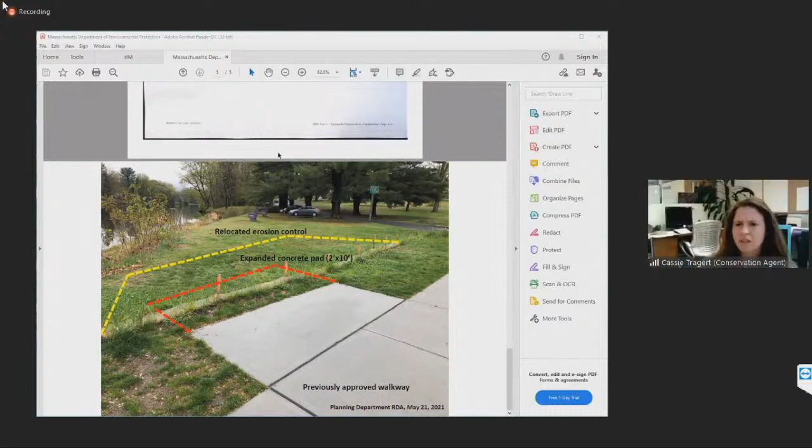So previously, we issued a negative determination type 3. And then the only special conditions were that the commission shall be contacted 48 hours before the start of work to inspect erosion controls, and shall be notified upon completion of the work to inspect the site stability before erosion controls are removed.

Thank you. Would anyone care to make a motion, with that in mind? Motion to issue a negative determination type 3 with the same condition we had previously for the pre-construction inspection of the erosion controls. I'll second.

All those in favor, roll call vote. August? Aye. Busa? Aye. Buttrick? Aye. Ryan? Aye. Teffer? Aye. Whittemore? Not present. Motion carries.

Thank you. Can I ask one question? Of course. So based on what I just heard, it sounds like there has to be a 48-hour notice before it would be poured. Did I understand that correctly?

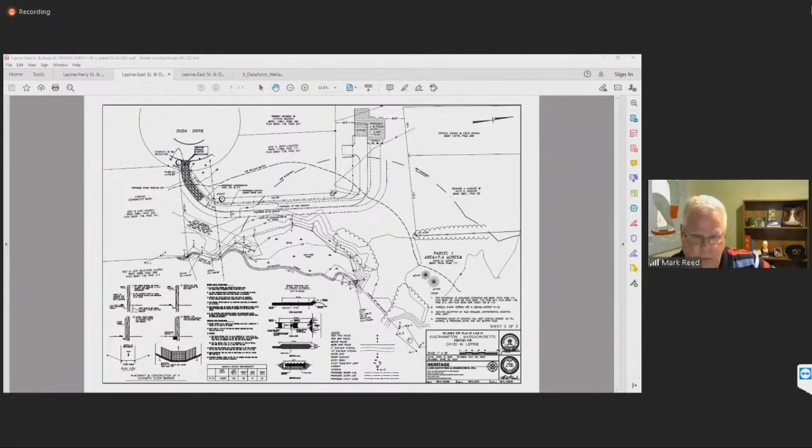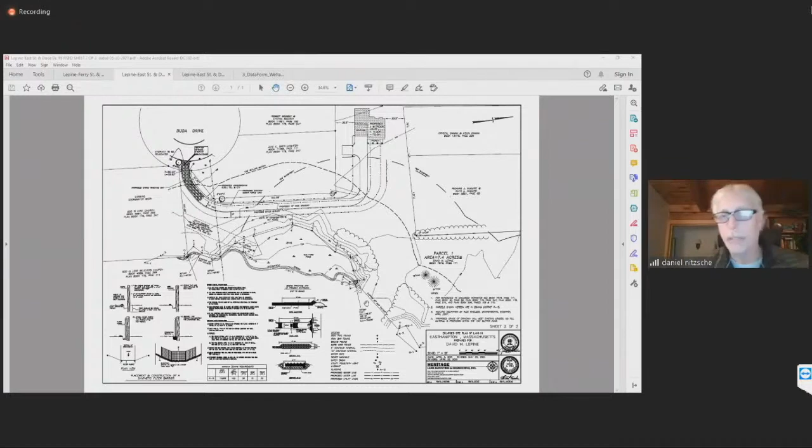Certainly. Thanks, Mark. So when we went to the property on Saturday the 8th, we looked at the pond area as well as up gradient or upstream to get the full delineation of the resource areas that would project jurisdiction into the work zone. We started over by the detention basin on the southern end along that intermittent stream. I believe on the documentation provided to the commission, we show the stream stats data that confirms that is an intermittent stream, despite the fact that local folks believe it flows a lot. It still doesn't meet the criteria of a perennial stream. Its watershed is too small in size. So we confirmed the intermittent part, and then we delineated the edge of the old farm pond essentially as a bordering vegetated wetland that's bordering on that stream down to the outlet structure.

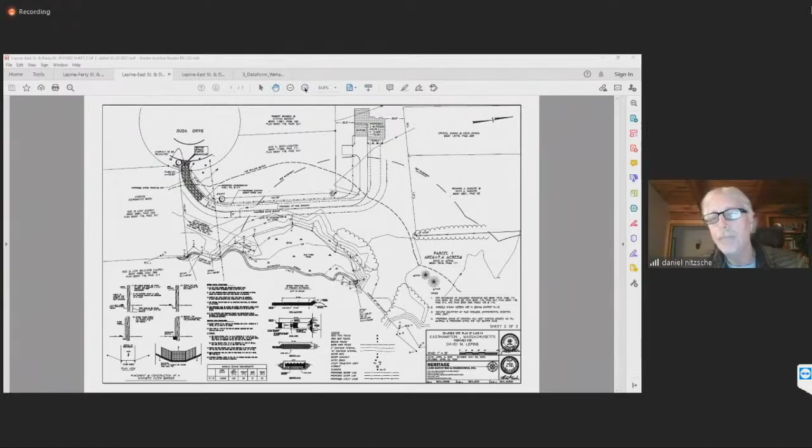And then we flagged again on the downstream side, the B flagging, which is essentially bank flags, except B4 is really a BVW. There's a hill, there's a seep coming out of that slope around flag B4. That's representing more of a bordering vegetated wetland point, but the remaining flags are essentially bank / mean annual high water line for that, since that's a perennial stream going out in that direction. We provide a data form for flag 15 for the commission's review. So not much different than what Alec McLeod put out there, other than I don't know if he had the drained pond. I'm assuming it was a drained pond at the time, but we had bordering vegetated wetland to that intermittent stream, and then the perennial stream on the outlet end.

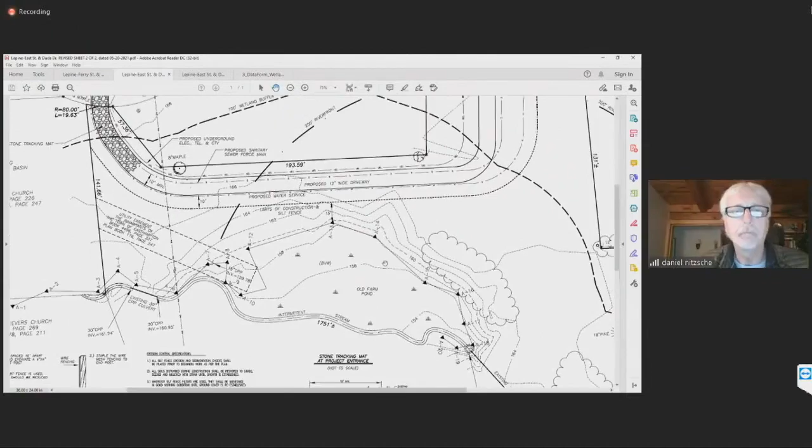So with that, we could take questions from the commission. I think we've covered what was asked of us and made the modifications, and we are in compliance with the regulations.

Thank you. Are there questions from any members of the commission before I ask mine? I had a question, thank you, Deborah. Thank you, Mark. At last meeting, I had asked how much disturbance there would be for the driveway. Were you able to come up with that?

Yes. So with the driveway, with the work within the riverfront area, it is 10,604 square feet within the riverfront area. The remaining section, which is within the 100-foot buffer zone, starts up here closer to Duda Drive and comes around the corner. There's approximately 1,800 square feet of work in the 100-foot buffer zone, outside the 200-foot riverfront area. So if you round it up, it's probably close to 12,000 square feet total between riverfront and buffer zone.

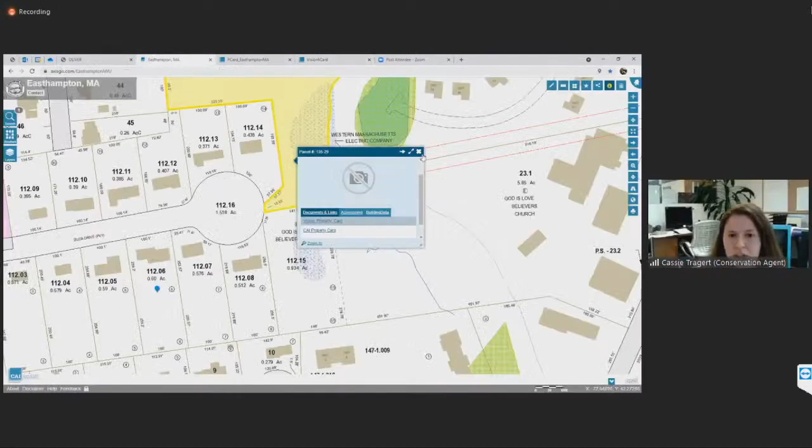Oh, that should be here. No, it's fine, it should be listed. So I can find it - you need to scroll up more. It's very slow to load, unfortunately. Let me zoom out one more.

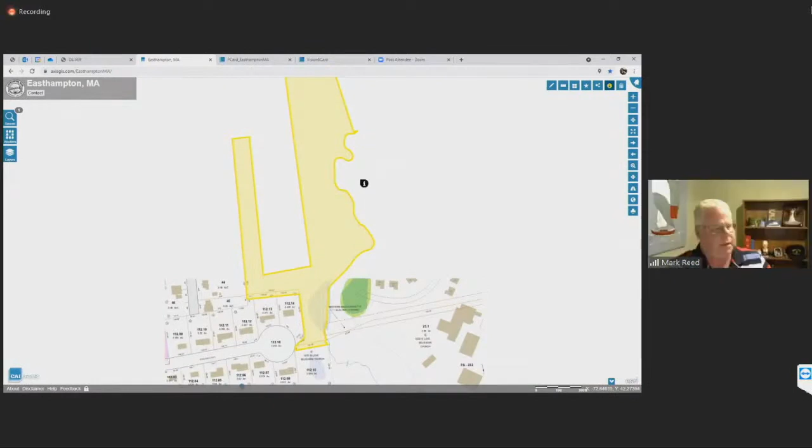It shows the total parcel area is 7.4 acres of land. Thank you, Mark. Yep, it's shown on sheet 1.

Okay, so while Cassie is so graciously reviewing that as part of this conversation, Mark, can you share photographs of the riverfront area where the driveway is proposed?

Cassie has those based on our site visit that we did. And I can look on the Registry of Deeds site. Cassie, is that book 15? Yep, so for the very, very first one, it's 1568/310. Okay, I'll keep this up.

I'm going to stop sharing. I'll pull up the pictures, Melissa, and show you. This is from the site visit. Let's see.

That's a very old deed book. Okay, here we go. All right, so this was from April 21st.

And I'm going to, let's see, open the sky. Share the screen. Okay, so where this fire hydrant is right here is the end of the driveway.

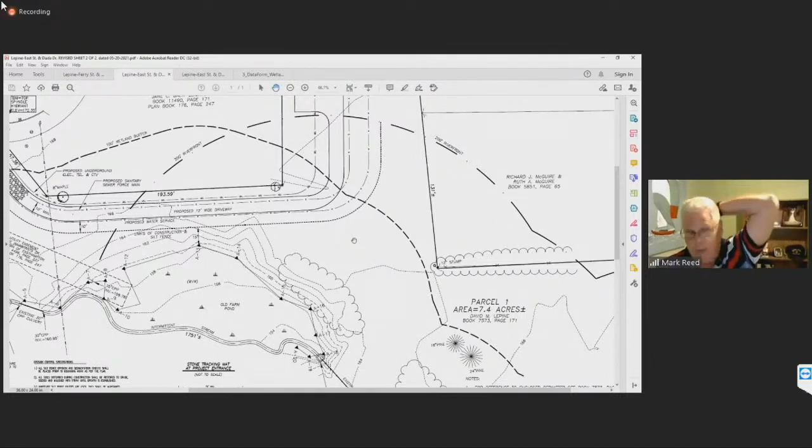Unfortunately, there's a lot of natural erosion of the embankment because of the steep slopes going all the way out to Ferry Street. But, Mark, sorry, I didn't mean to interrupt you. No, not that meets that criteria. So can you, do you have a scale tool?

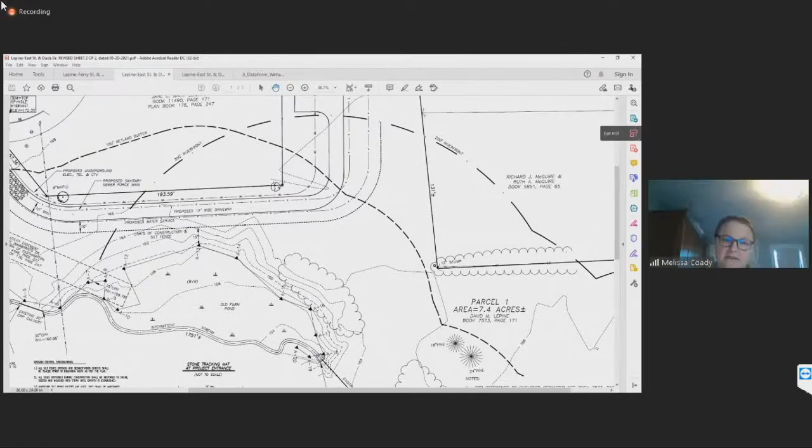Can you kind of scale off or approximate where the first 100 feet would be? It's a little atypical because we're in the arc, so I'm trying to visualize off. Right, and if that's the case, that concern will be assuaged.

So where's my little scale here? Unfortunately, this is not cooperating with me as far as my scaling tool. I don't believe so. But my scale is not showing up on my PDF.

Okay. So it is, I can scale it. I got a full-size copy of the plan sitting here in front of me on my desk. Can you do that and then hover over the equivalent points? Sure, that would be perfect. So this is a 20 scale drawing.

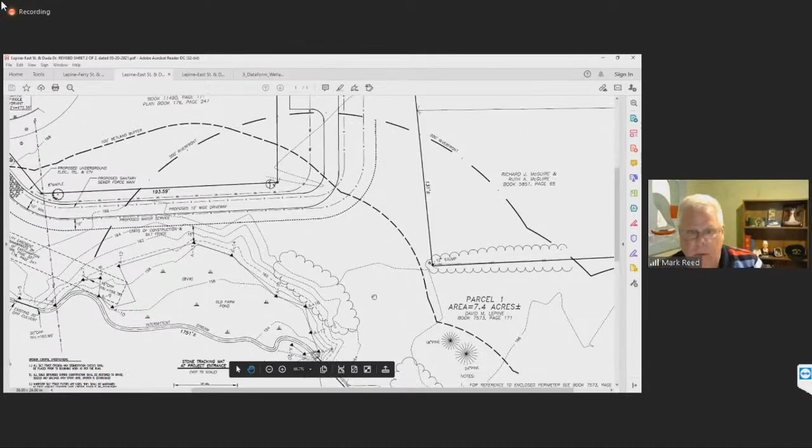So the first 100 feet is, from that control structure, which is where the riverfront starts, to the limit of work line, is 110 feet. So we're outside the 100-foot. If you draw a line straight from here to here, it's 110 feet. That's what I wanted to understand. Thank you. Yep, I guess we should have put that in the dimensioning of the drawing, but yes.

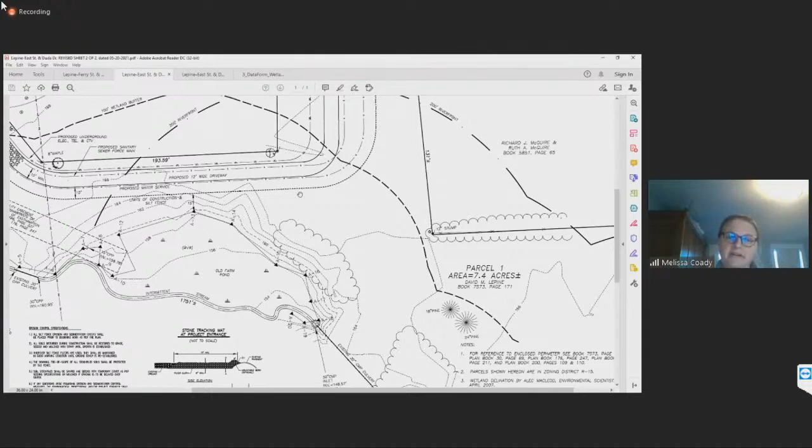Yeah, pros and cons of another line on the drawing, that's for sure. Right. Okay. So are there any other questions from commission members at this time?

So with regard to the 100-foot discussion, we've shown that we're outside of the 100-foot, but I believe there's also a requirement that if there's not 100 feet of intact vegetation, you're asked to expand that to create a 100-foot buffer. Has that been considered?

The first 100 foot is all vegetated, like shown in those pictures that Cassie has. It's either the old farm fields and meadow, or brush. So it is vegetated, but it's vegetated with something other than maintained lawn. It's undisturbed. Correct, it's undisturbed.

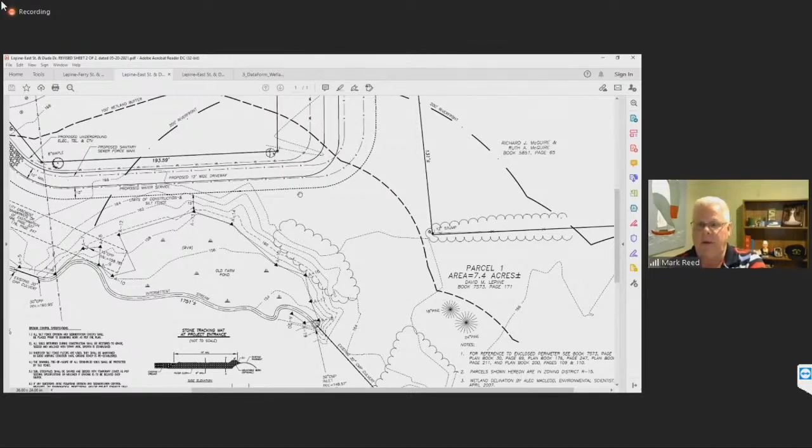Some of those pictures, Kathy, further on when they were showing the poles for the grow area, that's not lawn area. The lawn area really is where the proposed driveway is going to go - that is the maintained lawn area. And that is maintained not by Mr. Lepine, it is maintained by the abutter. Yeah, I can share my screen again and show those pictures if you want, Julie, of that area beyond where the driveway is, beyond the curve of it.

Oh, I'm sorry, I gotta stop sharing. Wake up, I didn't know if she wanted me to, if you guys wanted me to do it, I don't mind. No, I will stop sharing. Okay, sorry, it's okay, hold on.

Let's see if I can, I know I got pictures. So I think this is that area, if you're seeing it. Correct, yeah.

The culvert where it goes underground is to my right. Ferry Street is up ahead, and the perennial stream goes up through. We're inside the riverfront area. Let's see if I can get it better.

So that area would be looking back towards the piece of property that runs westerly. So you're looking kind of westerly. That area is all currently vegetated, it's not lawn, not maintained as a lawn area.

The extent of the maintained lawn is over there to the left. That's where the hop growing operation was, where all the poles were.

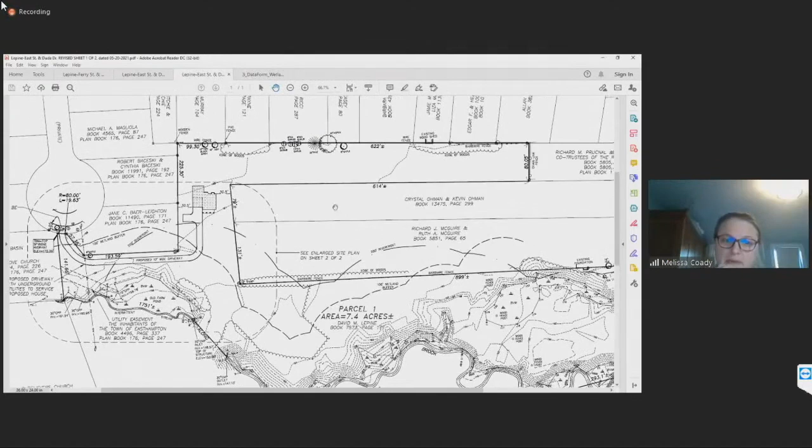Okay, oh, I had a question before Mark took the map down. Oh, I'm sorry, I'll put it back. So my question is, I was looking through the paperwork, and there's a

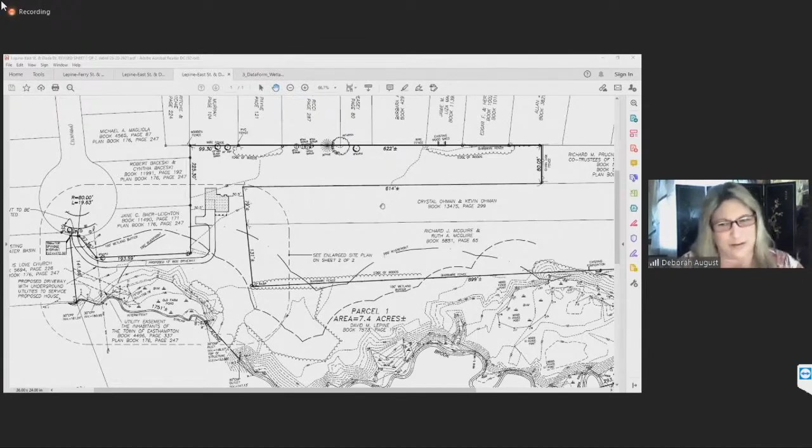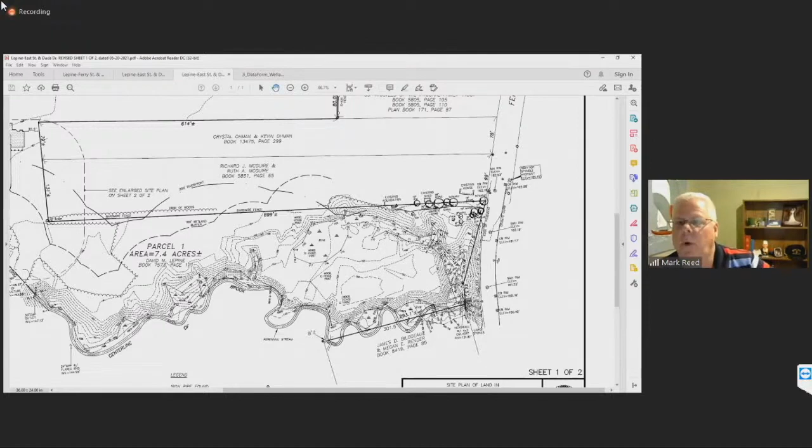Proposal for a replication area for the BVW. I don't remember hearing about it in this meeting or the last meeting. I believe that reference is, for instance, if we were going to try to build a driveway access to the house off of East Street, it would require crossing this intermittent stream. Let me zoom in on this.

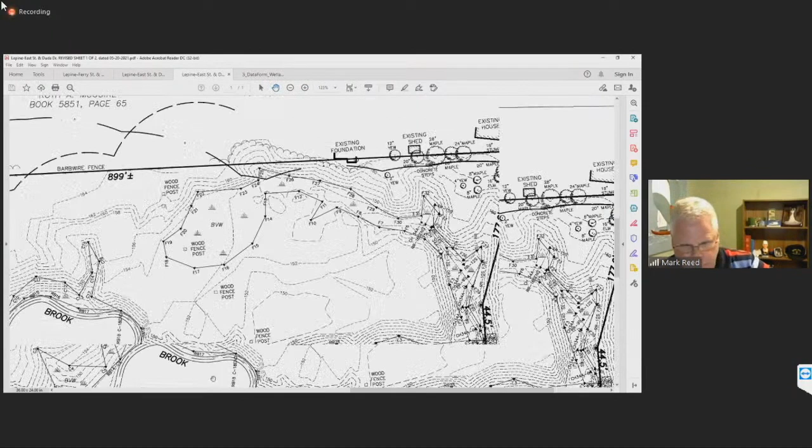So there's a series of the brook, the perennial stream. There's an intermittent stream that comes up into this wetland finger, and all BVW around here. So if someone was to try to build off of Ferry Street, they would have to put in a bridge crossing and potentially do some wetland fill or replication areas.

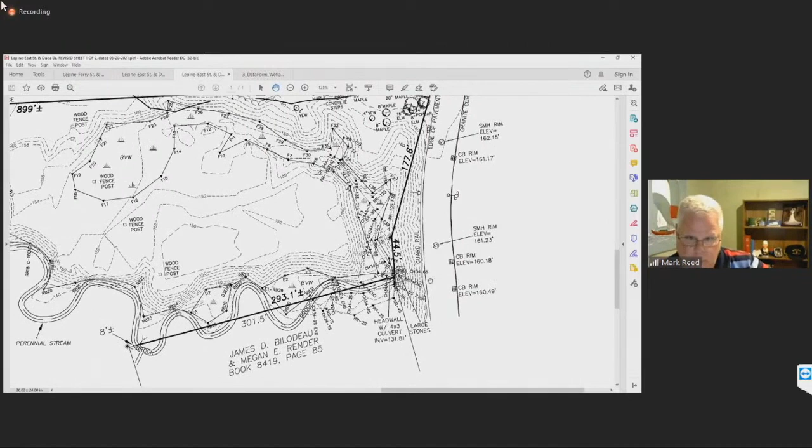Just not economically feasible to do that. The topography is very steep. I know probably some years ago, the commission had to deal with the washout of the road itself in this area because of the steep slopes and the erosion in the area.

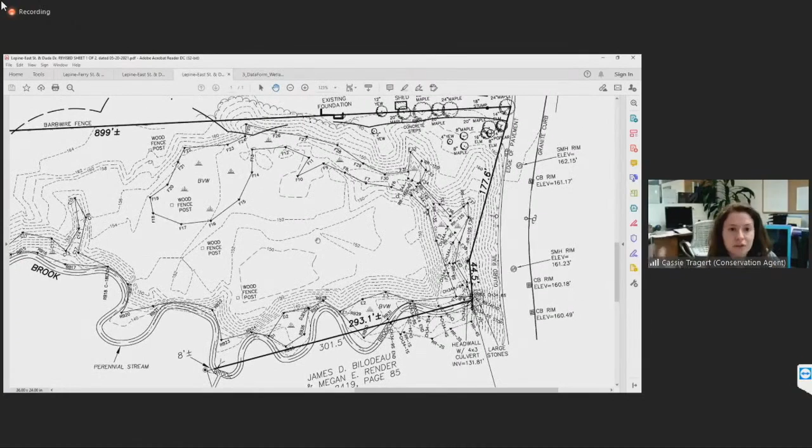So I believe that reference, Deborah, was to if somebody was going to try to come off of Ferry Street with the property, there may have to be some wetland replication. So that was part of your alternatives analysis? Correct. Okay, yeah, so it's not what is being proposed here. It's just that the only other place to come from is Ferry Street, and the only other legal frontage is off of Ferry Street for the piece. Okay, but we're not proposing that.

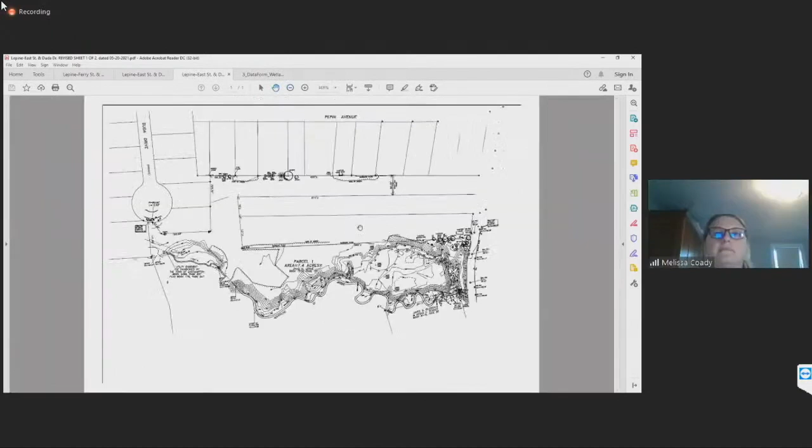Right. So it's a single family residence, which is exempt from the requirements for stormwater management. Yes. So, we've located the house outside of the riverfront area in the 100-foot buffer zone. Yep.

So is there any further discussion of the areas of riverfront within the footprint of proposed work relative to wildlife habitat functions and values? Anyone? It seems fairly limited based on historic agricultural use and the maintained lawn footprint.

Okay, and then the final standard is proposed work shall not impair surface or groundwater quality. I would agree that stormwater management's not required and erosion and sedimentation controls have been included. So the nice thing about this is that the proposed driveway that comes from Duda Drive can follow the existing topography with little or no grade change.

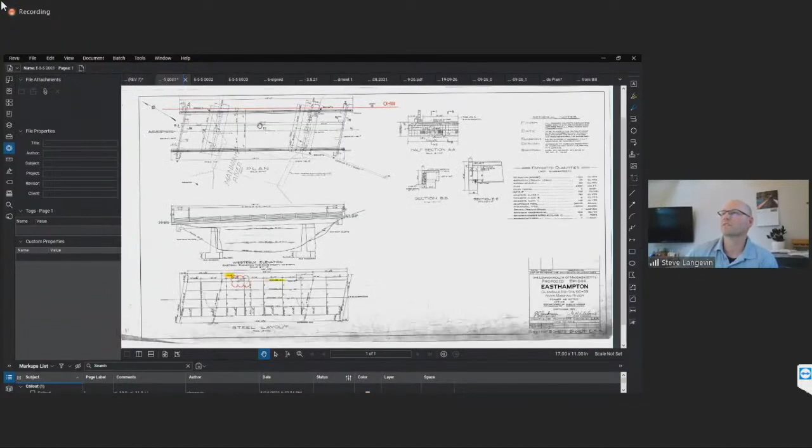The thing to do now is go to the repair detail, which shows a plan view of the repair area and a bunch of notes. But I think first I'll start off with just this plan view. So basically this bridge was built in, was it 1937? And it's a steel beam bridge with about 5 beams and a concrete deck.

The beams are in very poor condition, as Daniel mentioned, and there are lots of locations that need repairs. But the one area we're most concerned with, looking at this bird's eye view with north going up this way, is this area on the northeast side.

It's the north splice on this bridge where the two beams meet — it's a 3-span continuous bridge, which as a structural engineer is very impressive, because in 1937 they didn't have computers to design this thing. That kind of blew me away. Someone spent a lot of time designing this bridge. The beams come out to the site in 3 pieces, and at this location there's a splice that connects the pieces together when they're actually constructing the bridge.

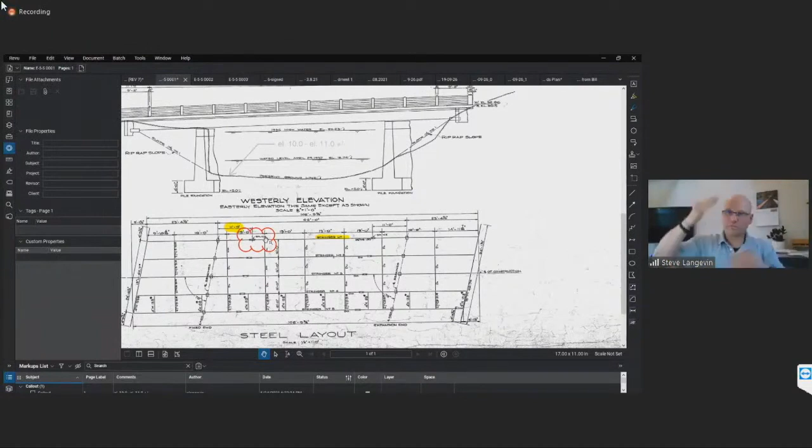Right along where the two beams meet, there are plates that connect with rivets, but there's a crack and then a major section loss right at that location. So the beams are kind of splitting apart a little bit, which is, in structural terms, very bad.

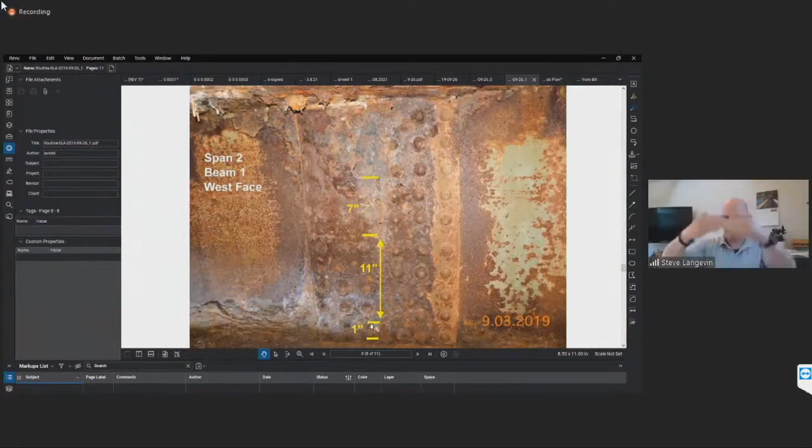Actually, I have a picture here if you want to see. These are where the beams come together, and this is like a kind of rusting of the steel right where the beams would be. So essentially, they're kind of seemingly coming apart a little bit.

So my repair detail, or GPI's repair detail, is to come in and put a larger plate over this area of the smaller plate. There are currently 60 rivets out there; we're going to expand that to 90 rivets and 90 high strength bolts. We're going to keep about 30 of the existing rivets in place. In order to make this happen, we're going to make a sandwich of steel.

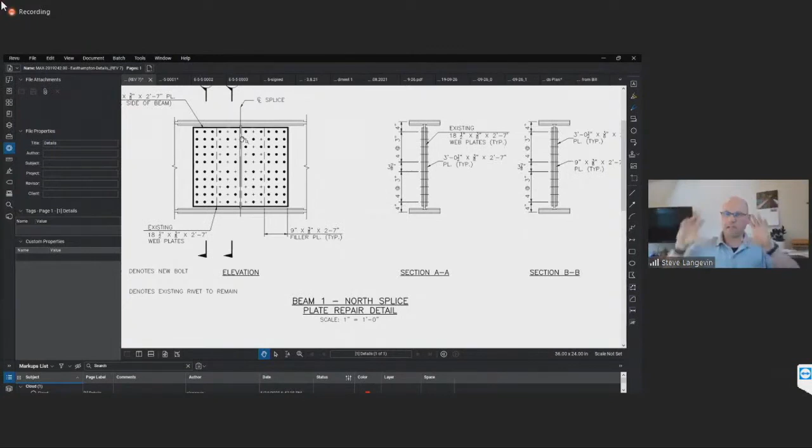And we're going to put some epoxy in there. This is actually a Mass DOT comment - they wanted to put epoxy in, put the plates in place, then gradually and carefully replace and add the new bolts, and also bore out some of the existing rivets. Right now they're just, as you saw in the picture, all corroded down. They're flat, not really doing their job. There's still a lot in place - it's not totally dangerous yet, but they need to be replaced soon.

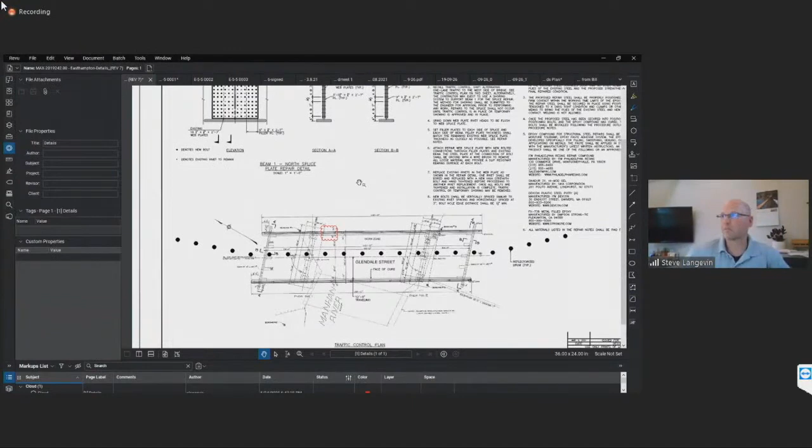So what we're trying to do here, that's the location again in plan view. The contractor can jump in a moment to talk about the repair detail, but what we're talking about doing is shutting down part of the road with some drums so that there isn't live load extra loading on that area where that beam is during construction while they're replacing some of those rivets with bolts. That would be in lieu of doing any kind of shoring underwater and in the water.

So on the Manhan River, what the contractor would have to do - I can talk more about it - but from what I understand, we're looking at going in there with waders and some scaffolding, because it's probably about 20 feet above the riverbed. They'll have to figure out a way to get up there and do the repair. All the impacts to the river at that point are just to access the beams to do the repair, so there's not a lot of change going on here, and there shouldn't be too much disturbance.

The beams are not being painted in the field. There's no welding. There is the grinding that would be required, and the attachment of the plates.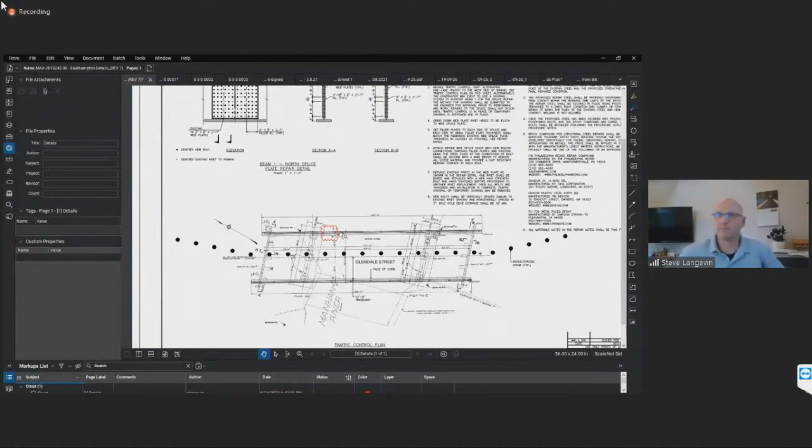Thanks, Steve. So our approach to this is, the repair is fairly straightforward and simple. The big thing for us is obviously access to the repair point there. Our thought was to get in the river with some scaffolding - it's like a 7x7 footprint, little tower, and it's about a 5-day job.

So since it's short term, we're thinking to stick a scaffold tower in the water so our guys can access it every day. It's probably a day to set it up and start cleaning up the repair, and then we'd line it with poly to catch any of the rust flakes and all that stuff, and then just do the repair. That's one of the approaches we think is the quickest.

Another approach would be to hang something off of the beams, but again, you're entering the water to make that happen as well. So I think just from looking at the scope, my opinion is to stick a shoring tower in there. I don't know if that affects anything for you guys.

Sorry, putting in my dinner order.

The area is mapped as... let me see if I can get this to... priority and estimated habitat. Do you know what the Natural Heritage has mapped at that area, at that location?

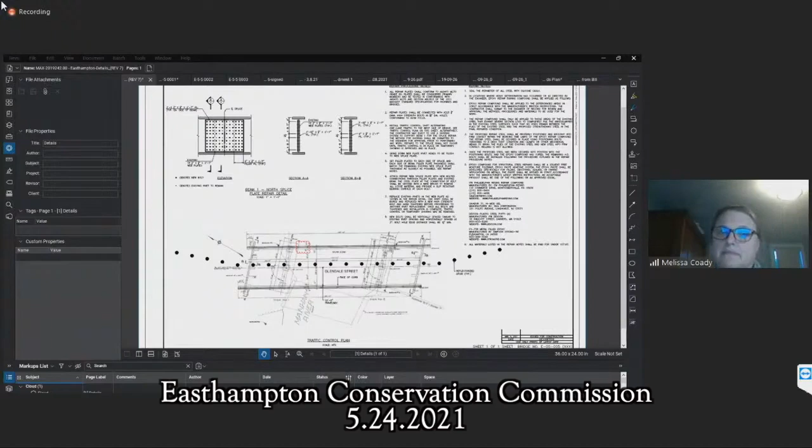It may be turtles, it could be dragonflies, I don't know if it'd be a mussel species. Not that that's been an issue before, but I think that would be good information to verify. You could reach out to Natural Heritage.

Honestly, I think strategically that could be a consideration, how to make this go most expeditiously. Do you have a schedule in mind? Well, we've got the contractor on board, and we're obviously hoping, as soon as we get approval from the commission, we're going to go.

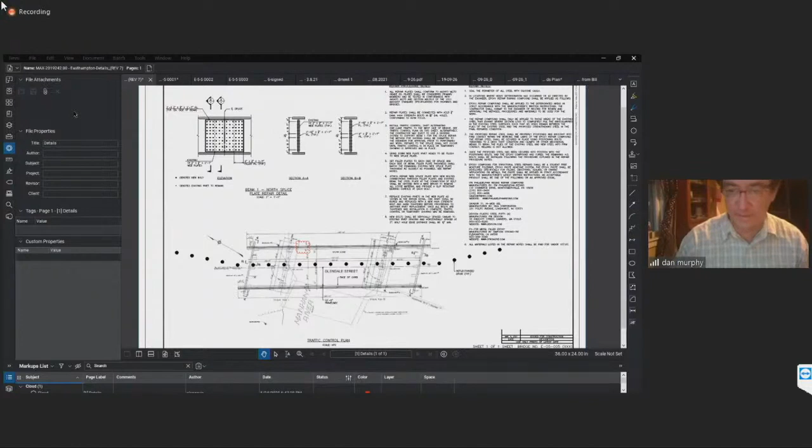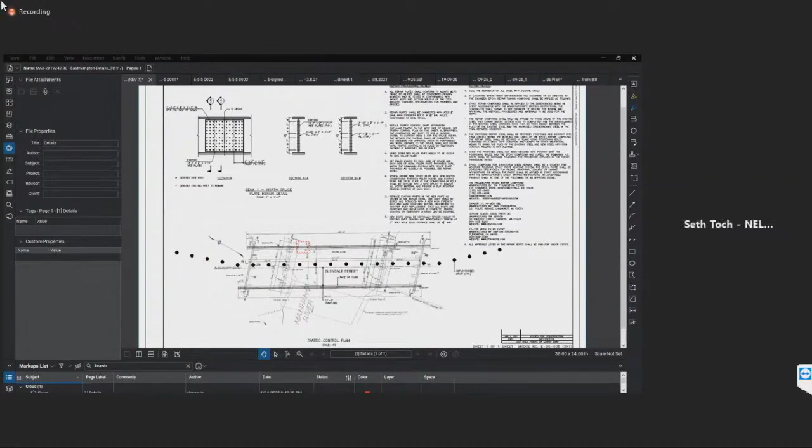Do you know by how much? The legs on that thing are probably 8 inches. So they're like 8 inches wide, but do you know how deep? I'm sorry, they're like 8 inches deep. Oh, okay, they're like 2-inch posts. An inch and a half, yeah. So it's almost like a post.

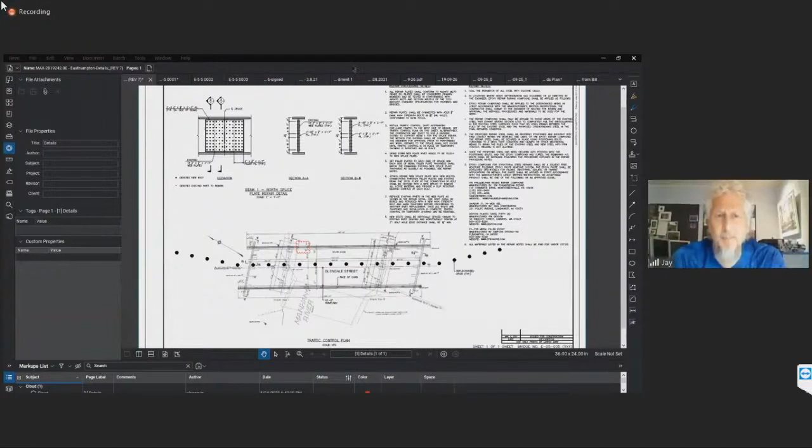Is the substrate fairly muddy, or are we sure there's enough bedrock substrate to actually put the scaffolding on? Or is that something you know more about than I do probably. Sandy bottom stream through there. It's a sand bottom, yeah. That's partly why I'm a little bit concerned about figuring out what Natural Heritage has mapped there.

Drawing from personal experience, I've been told that under a bridge in a different place was where the largest specimens of a certain state-listed mussel were observed. So I would want to make sure we're not on the wrong side of Natural Heritage on this one.

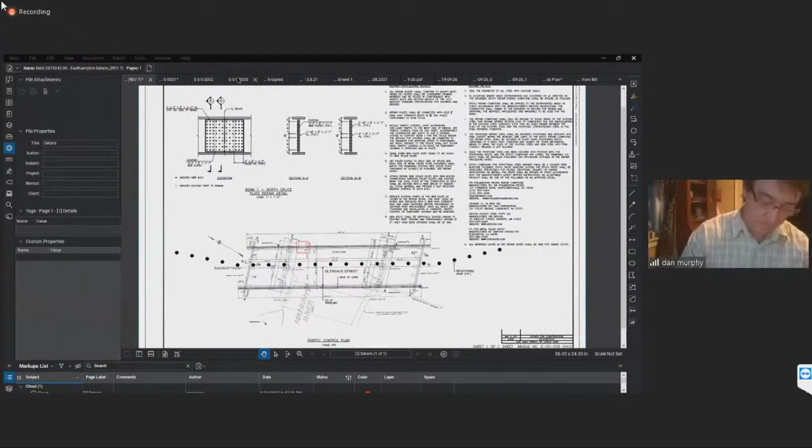If we can, look into whether or not this would fit under... I agree, scaffolding and waders in a river is definitely a gray area. So if we can get an answer on that and follow up with you, Dan, or if you can reach out to Natural Heritage. Sure, and Cassie, you can maybe.

Are you wanting like a letter from Natural Heritage like we get with other projects, or are you wanting just them to tell him what kind of thing is there? I'm wondering if you can just get an information request, a list of species.

Cool, yeah, so it's in priority and estimated habitat. So Natural Heritage is going to have jurisdiction under MESA and the Wetlands Protection Act, if that's the case. So the benefit of a Notice of Intent is a streamlined review from Natural Heritage, holding them to 30 instead of 60 days, but it may just be worth a conversation with them to get their take on whether or not this can be done in a way that they can somehow exempt it from MESA.

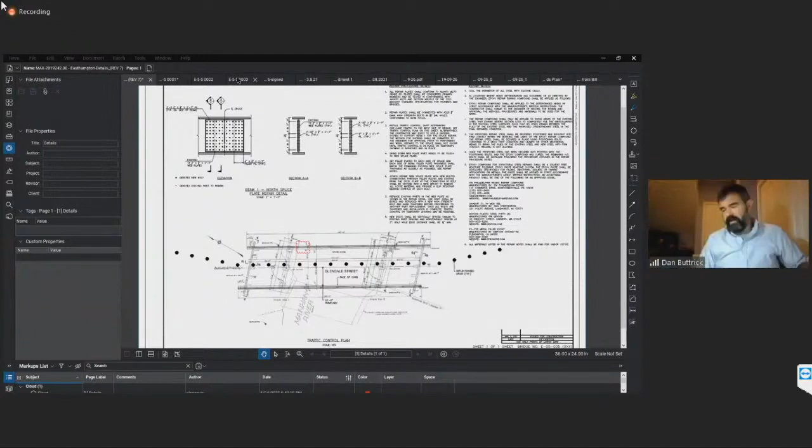If that makes sense, Dan? Yeah. I have just a question. Does anybody know under what conditions bridge projects are Wetland Protection Act exempt? When they're MassDOT projects. Are you using MassDOT funding for this, Dan? I think it's when MassDOT does the project, Dan. Yeah, no, this is ours.

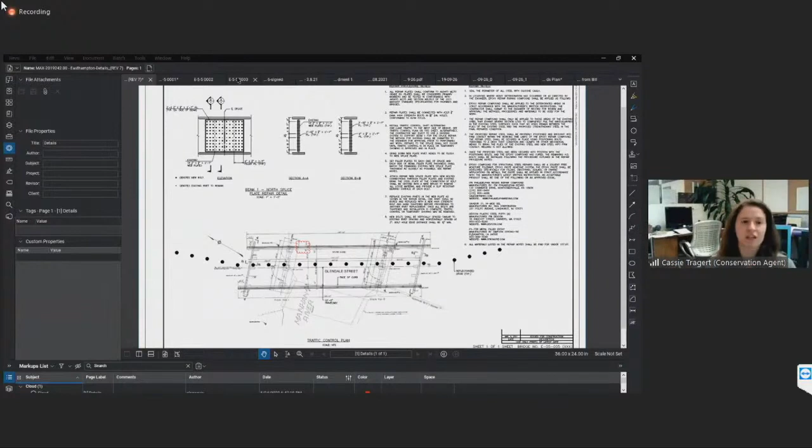So we're thinking, barring whatever we find out from Natural Heritage, just with the nature of the work as it is - say, assuming Natural Heritage is fine with it, we're fine - would they still need to get an NOI, or would it be an RDA, or do we not know? Or would it be covered under the bylaw? I think we have to figure out if it's covered under the bylaw.

I don't know if this is appropriate, but in the interest of time, do you think that's something we could determine tonight? Do you have it handy? Yeah, can you pull it up? That'd be nice. Translation, I have no recollection of the specifics of that table. I have it right here. Hold on just a second.

So you're going to drill a bunch of new holes to apply this new plate to have more attachment points, right? So you're going to collect the drilling remnants with poly or something? Is that the plan? Not sure. Yep, we'll typically line the platform with some 6 mil poly.

While Cassie's pulling that up, where do you envision, how much of a staging area do you need, and where will that staging area be? That work, we don't need a ton of space to do the work. Really, when you mean staging, you mean like my trucks and stuff like that? Yeah, where are people going to... that's a road, there's no place. Yeah, we're going to have the barrels taken right there, so there should be enough room for one truck, and that's really all I need to perform the work.